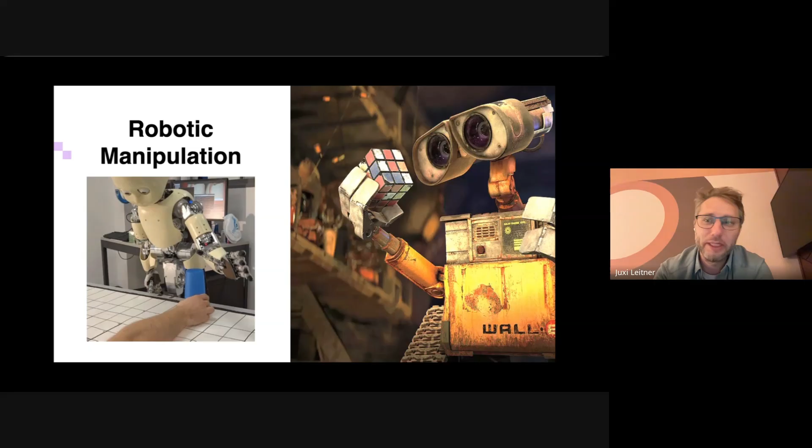You can see my hand in there, I'm trying to move this blue cup up and down and out of the way of the robot, and the robot should try to pick this up. We were very excited about this about ten years ago and what we could do with the humanoid. Obviously there's hype about these things now, but for me, trying to get robotic systems to pick up things has been going on for a long time.

And what I'm trying to do today, in the next half hour or so, is trying to see how robustness differs if you look at it from these different angles and different scenarios. I assume that most of you will be from academia. And so let's start with the academic point of view first.

So I've been working on robotic manipulation, as I said, for a while, as also mentioned in the intro, for a long time. I feel old when he said that, but yeah, this is work that we did in the mid 2010s. So that's 2016 to 18. We worked on how we can get a robotic system to be robust to changes in the environment. So picking up items that are moving around, picking up items that we might have not seen before, picking up items that are in a pile or in clutter.

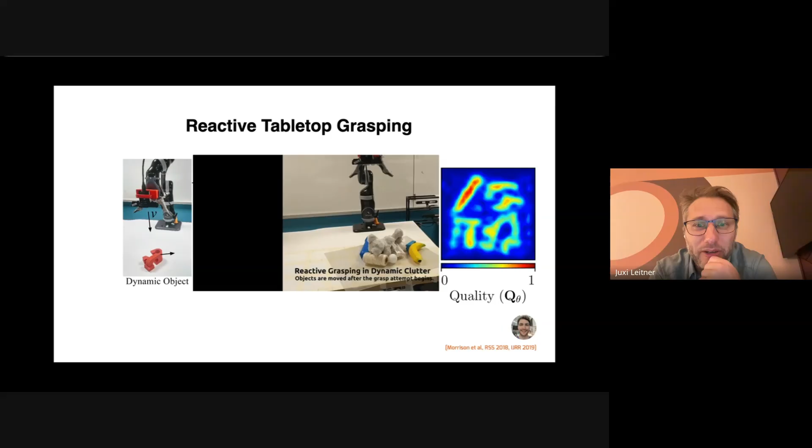But it's really hard to compare that to somebody else's algorithm. And so one of the things that we tried to do is, can we somewhat standardize that? And we were not the first ones to do that.

There's lots of different ways of benchmarking grasping out there. But what Doug, one of my PhD students at the time, did was ask: can we find a more optimal way of a distribution of items? And he called them EGAD, which is evolved, like evolutionary computation. It's still a thing. An evolved data set of different items that provide a grasp difficulty, so from simple to complex, and a shape complexity from more spherical, round to really spiky, pointy things.

So I think that's a very common way in academia to think of how do we compare? We create a metric and we create a benchmark and we try to compare things. As I said, a benchmark is usually not just items, but actually a task that you perform. So we came up with a different way of how we could define tasks that are not just tabletop. Again, expanding on the robustness idea, we claimed that our system can pick up everything, but from the top. Can we now pick up everything from a front-on shelf?

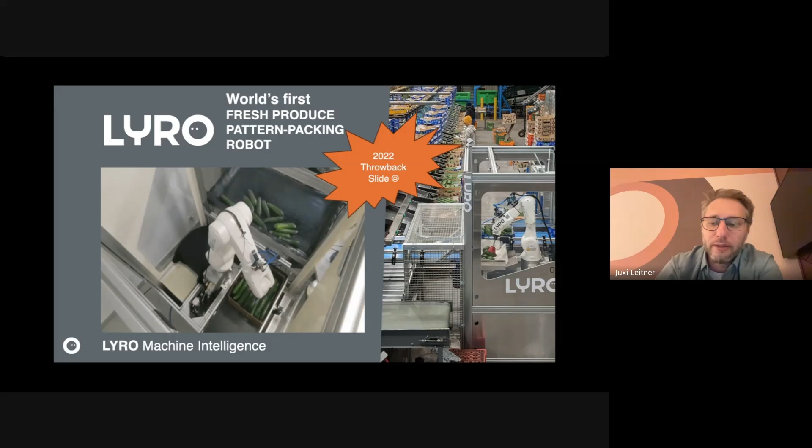And particularly, we tried to understand how we can build a product out of it. But very quickly, talking to customers, it turns out that they don't really care about the metric of your wonderful convolutional neural network. For them, the product is not the robotic system and it's not AI. For them, the product is a thing that provides, in this case, a service to pack produce items into a box. So I think this is a lesson learned from doing this tech transfer and looking at it from that different angle.

The robustness is not about the specific robustness or capability of an algorithm, but it's the robustness of the whole system. How many people do you need to stand next to a robot to fix it when it breaks? How often does it break? And what is the robustness, particularly if, let's say, you want to pack zucchinis in the morning and avocados in the afternoon, and maybe the next day you want to pack sweet potatoes. And these are all things that we tried to do with our robotic system.

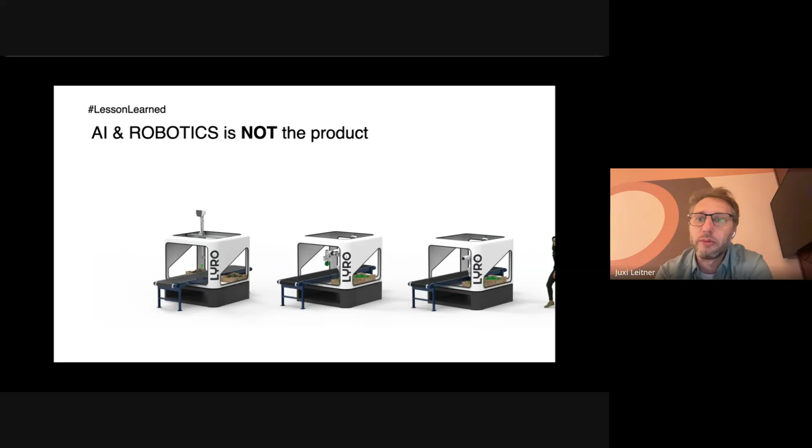The other thing, and this is again a slide from a couple of years ago from our startup, where on the left-hand side you see a very early prototype of our system, also in a warehouse-like scenario. And the BHAG is a venture capital acronym. It stands for Big, Hairy, Audacious Goal. So it's basically the main goal that you try to achieve with raising funds.

And for us, reliability and robustness, not on this slide, but under the larger umbrella, was one of the things that we wanted to aim for. And that came out of a conversation with the customers where you need to pick millions of items per week. Ideally, you want to pick a range of items, from something that's a couple of grams to something that's really heavy. I think the heaviest thing we picked was a watermelon of about 3.5 kilos. But you also need to make this system robust and reliable enough that even if you change the box type, you can actually pack into it.

And why is that actually important? Because it turns out that these boxes are not always exactly the same. They come from different suppliers and there are margins and variations in there, but they also deform, particularly if you're in a humid climate in the very north of Australia versus in the south where you might have a very dry climate.

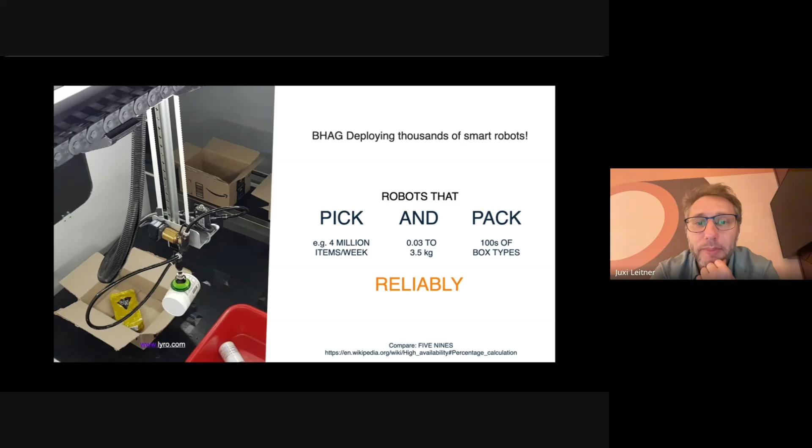These boxes actually shift around and deform a bit. And so you need to be able to be robust to those changes. So that was the pitch there. But turns out most of the investors didn't really understand what intelligent robots are. So this is a slide.

Again, I'm rephrasing what it is that we as academics would say is a robust system or a robust algorithm to something that is a robust product. And then in simple terms to investors, explain what that means. Also to customers, right? As I said, most of the time customers are not interested in the underlying technology, but they're interested in the capability.

And so one thing that for us was a core part to making it intelligent and why it was needed in the scenario is packing zucchinis here. We have a sensing system, in this case, a camera that looks down. And why is it important? Because as you can see, new produce is rolling in at random times. Even if you pick up one piece of zucchini, the other ones will slide in.

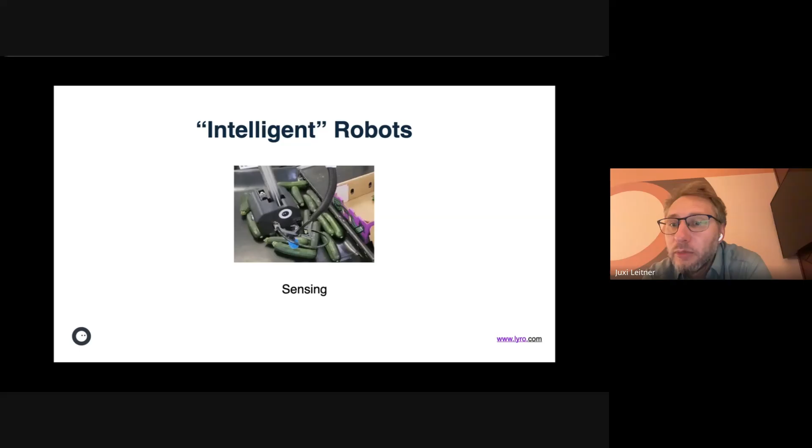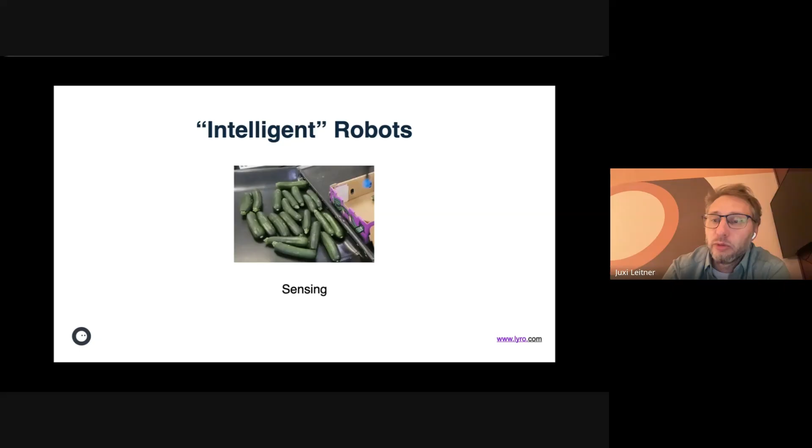So we need continuous information from the sensing capability to be robust to those changes, right? None of these zucchinis are identical. They wobble around, they roll around. And so you need to have a sensing capability that is robust. At the same time, we need to be flexible enough and adapt if things go not according to plan.

So this was the other part that we sold to customers. We are actually able to adapt. Again, we do require the sensing, but then we require the smarts to understand what the state of, in this case, the box in the world is. So we can be robust to some of these changes when they happen.

And the third part, we need to also be able to recover. And this is actually something that, I personally feel, particularly in robotic manipulation, is a less researched topic in academia: how do we do error detection and error recovery, or even just failure detection? I think it is a very important part, and it's a really critical part for startups and also for industry. And I have another slide on that later.

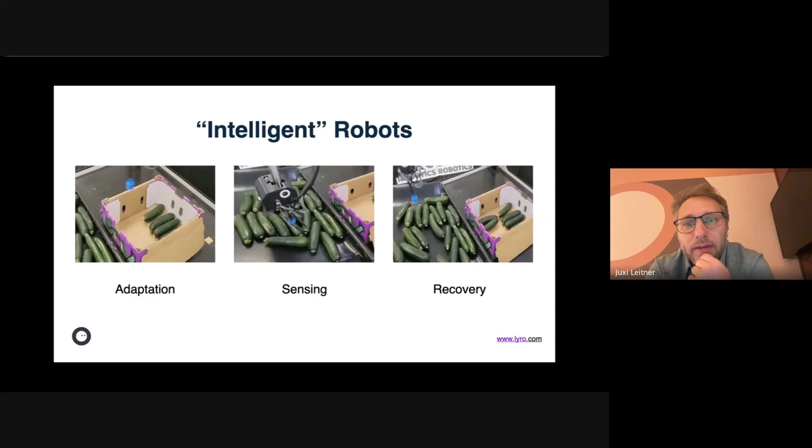And this is not just a capability question, but it's also throughput and in the end, an ROI question for a customer. So it is actually critically important to understand whether you are successful or not. In some cases, actually much more important than making it even better at the job. As long as you're somewhat okay, but you also know when you are failing, I think that's a really good entry point for a product into the market.

And so that's more from the startup angle where you're selling both to the customer, but also you're selling to investors, because you're always just half a step ahead, right? You haven't fully developed the technology, but you have a path towards it, while at the same time you're trying to convince investors to put more money in to help you with generating that technology that will create the product that you need.

And the third and more recent one, I'll talk a bit about how the challenges in industry are looking, particularly at the scale of Amazon. These are slides from Amazon from different presentations, merged together.

As mentioned before, I'm with Amazon Robotics, particularly the Berlin office in Germany, where we have a team of somewhere between 80 and 100 people. It keeps changing daily because we're hiring. It's a team specifically on a project called Vulcan. You can Google that and find a lot of information about it.

In Germany we have a product called Vulcan Pick, but we have a sister team in Seattle called Vulcan Stow. Both of us are trying to pick from these shelves you can see in the back, which we call fabric pods. They're cloth-based pods, very deformable, with very many items in them, and they have some very interesting challenges.

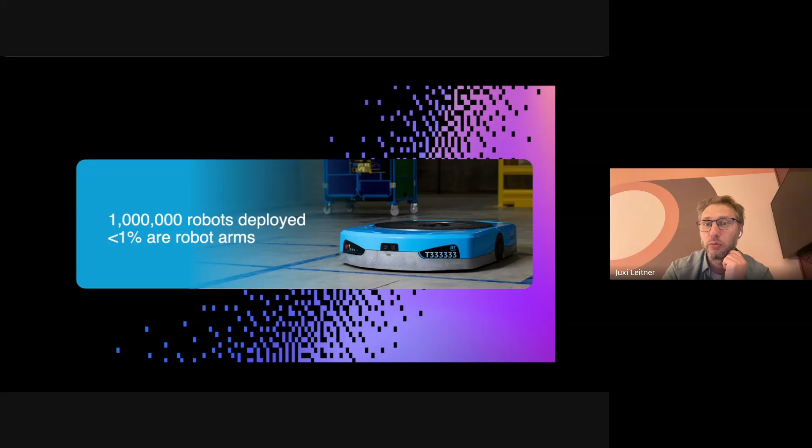Most of them are in what's called fulfillment centers, Amazon's term for warehouse, and most are these blue or orange robots that move things around, like shelves. But very few of them are robot arms, and I think there's a few reasons for that. In particular, what we're doing in Amazon Berlin is deploying more robotic arm systems to perform tasks.

There's a couple of videos I grabbed off Instagram and other places. You can see those yellow pods look like they're driving themselves, but they're being driven by robotic systems underneath, with people putting items in. You see a lady on the left putting a rather large item into the bin and struggling to get it in there.

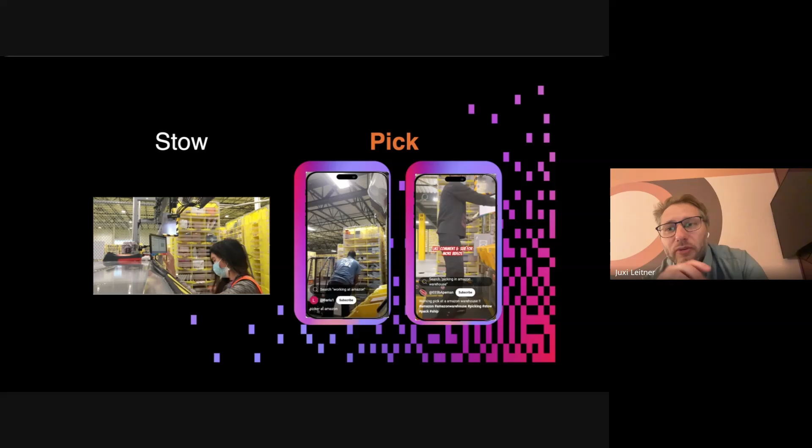You can also see these elastic bands around the bins. They're there because when these shelves move around, you don't want items falling out—there's no people in there where the robots move, and you don't want other robots to drive into them. So the person needs to push the elastic bands aside to put the items in.

As I said, this is the stowing side, done in Seattle, trying to automate that. We're trying to automate pick in Berlin, and you can see two people picking on the right-hand side. These shelves are a bit more than 2 meters tall, so sometimes people have to bend over to reach the bottom rows, and sometimes there are stairs, like in the middle video, that they use to climb up and reach the top shelves.

You can also see that sometimes people struggle to pick the right item. There were two items that looked very much the same, and you had to go in and actually pick up the correct one. These are the challenges Amazon is facing.

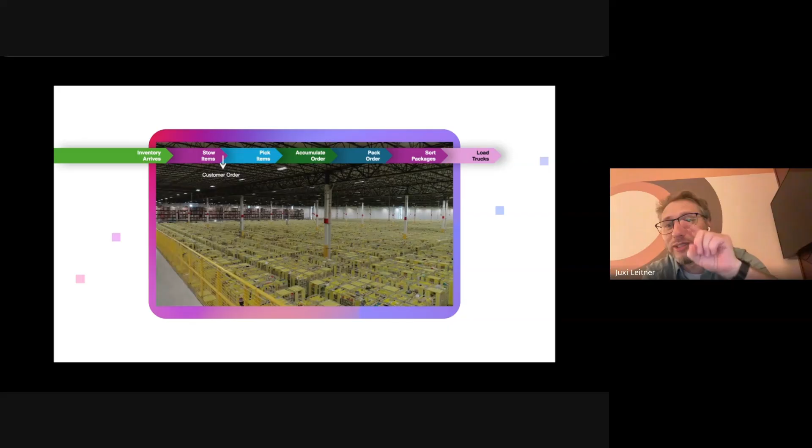But if you look at what happens once you click the button to order something—like a Wall-E DVD and a pair of socks—we're only a tiny fraction and one step in many that actually fulfills an order to you. Between inventory arriving and being stowed in these massive floors—this is a video where a drone flew through one of the fulfillment centers—you can see there's a near endless amount of shelves, and there are millions of these yellow shelves in the world.

So these items are being stowed once they arrive. Inventory arrives and we put them on the shelves, then people can order them online, and once they do, people need to pick that out. But that's not where it ends. There are many steps in sequence, and most of these steps happen in parallel. You can perform millions of these things in parallel because there are millions of orders coming through that need to be fulfilled. So the scale is pretty large, but we're only a tiny part of this problem we're trying to solve. Nevertheless, it's a quite interesting problem of scale.

There are hundreds of warehouses, thousands of robots we are aiming to deploy, and thousands of humans in each of these warehouses performing some of these tasks. There's actually some robotic systems that other teams, not ours, have deployed that pack parcels - you can Google that. There are other projects that have sorted a billion parcels in Amazon fulfillment operations.

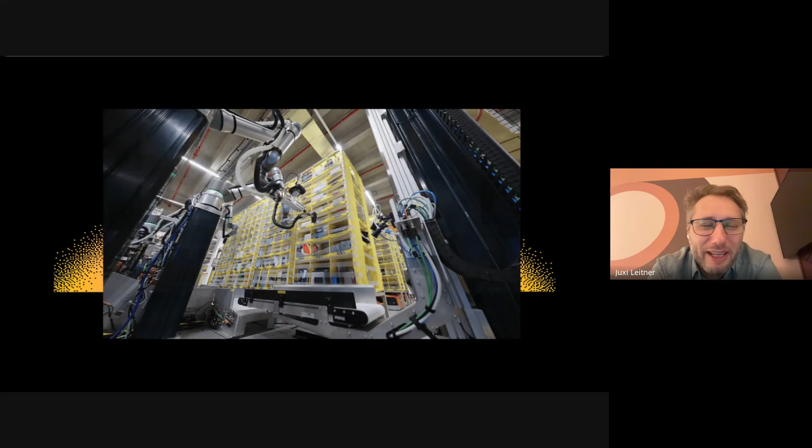But this is a picture of our actual system. You can see the same yellow shelves being driven, in this case by one of these orange drive units, to our station. You can see we have multiple robot arms required to perform the task. The team that I coordinate, called the extraction team within Vulcan Pick, deals with extracting, as the name suggests, the item out of the bin.

What that means is we have one robot arm that opens these elastic bands I mentioned before, and a second robot arm that actually drags the item out. During that operation, the conveyor belt is moving up, and we drag it out of the shelf onto the conveyor belt. Then that yellow shelf can move away and the next one can arrive. After us, somebody deals with the item once it's on the conveyor belt. That's the way of parallelizing the process so we can process a large number of systems.

I've hinted at this before - this is what we actually see. One of the nice things, and I'm an applied science manager meant to bring science into the product, is that the whole world for us, as Amazon manipulation or Amazon pick in this particular case, is a couple of inches by a couple of inches of a bin, all a couple of inches deep. So it's a very small world. We don't need to solve the whole self-driving car problem where everything needs to work everywhere on the planet, or domestic robots where every household is completely different. We have a very small world, but in that world, there's lots of things happening.

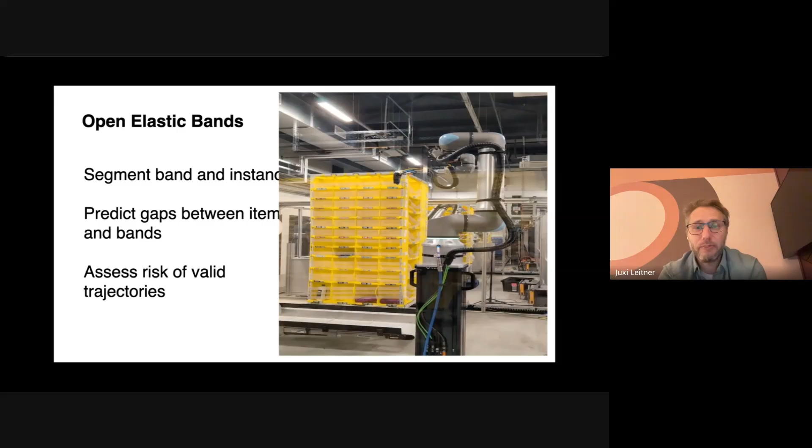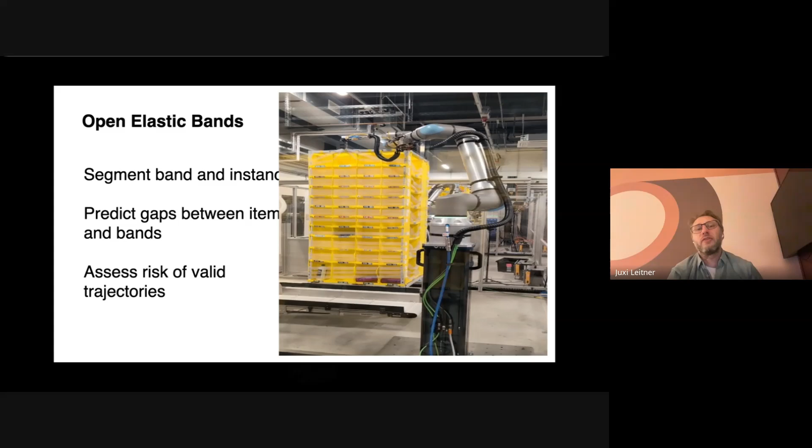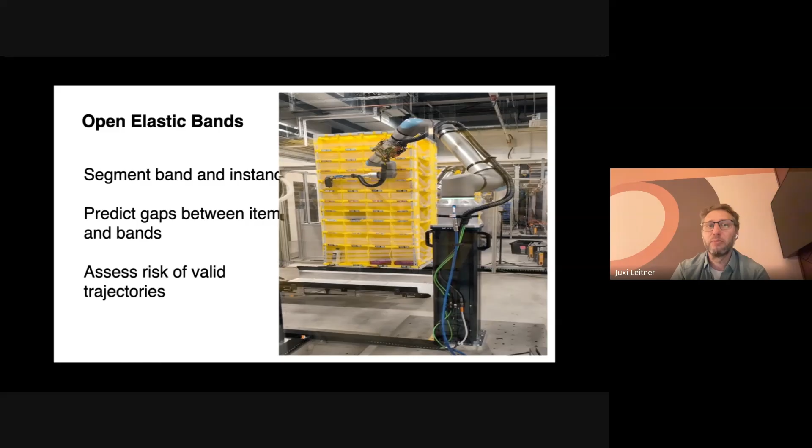This is a prototype from a couple of years ago. We tested different end effectors and different vision systems just to see whether that's feasible. To get these projects going, even at Amazon, and probably even more so at Amazon, you need to showcase that you have all the capabilities in place so you can actually perform that. It's not a complete moonshot. Yes, sure, at the beginning it is, but then you work through it and say, well, can we pick from clutter? Can we deal with those bands? Can we deal with that wobbly shelf? You want to showcase all these capabilities before you start building the system.

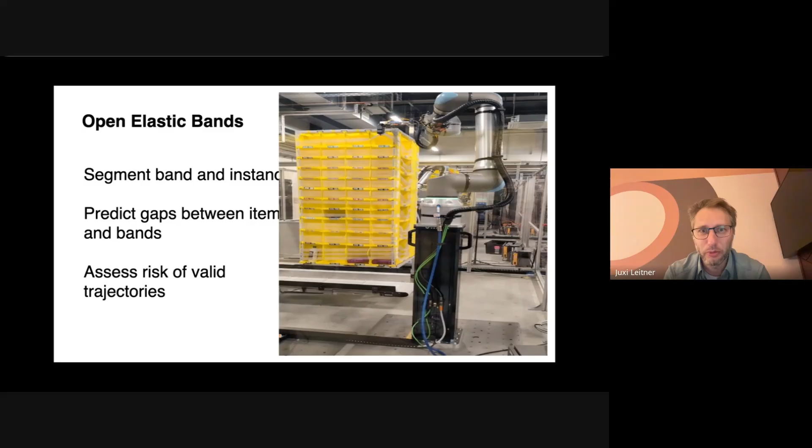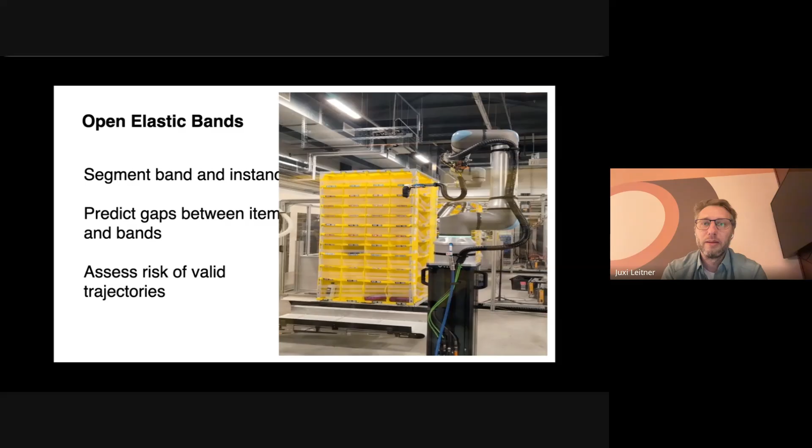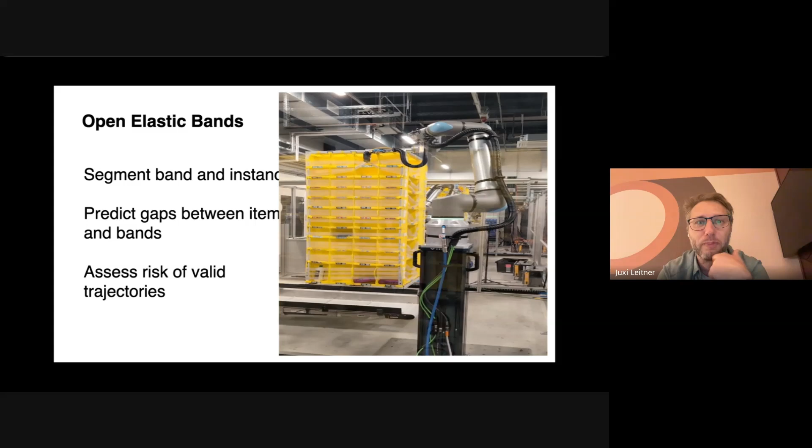So this is just the robotic system trying to open these bands. Personally, I find it really fascinating because elastic bands are super tricky. The perception is super hard because these things don't reflect very well, so your depth reading is very much off. So you kind of visually need to estimate where things are. But we actually made it to a point where this is becoming very, very reliable. And it needs to be robust to changes, because there are millions of these shelves out there. All of them have been interacted with for a different amount of time, and some of these bands are very stretched out, some are very fresh. So the forces and how you interact with these bands actually vary quite a bit between different interactions. And this is the robustness that we now care about — how can we actually deal with that part?

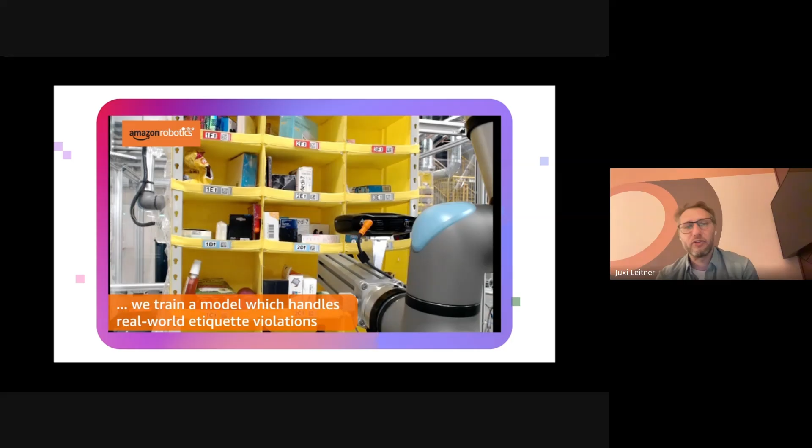The other part that we need to be robust to is: we'd like to get an item out, but sometimes an item is blocked by another item. This is actually not trivial — sometimes there are two things stuck very close to each other. So we started using policy learning and reinforcement learning to learn policies that will allow us to drag an item out, even if there are occlusions, even if one might be covered by something, or there's a lot of interaction potentially going on. The really interesting thing is, to make that robust, we actually don't care about what the item is — we care a lot more about the interaction between the items. So we actually work in depth rather than RGB, because it's a geometric problem much more than an item ID problem. And that allows us to work in a simplified simulator, which we can transfer to the real world, and you've seen that here in the video where we're trying to make that happen. This is aiming at being robust to the millions and millions of items that we actually interact with and get to see.

But then actually to extract the item, we need to do a bunch of different things as well. We need to first of all understand how many items are in the bin, and this is sort of where we start — we segment the items out. And then we need to understand which one of these segments is actually the item that I want to pick.

If you pick up a blue toothbrush rather than a red toothbrush, people will be slightly unhappy, but it's probably not a big issue. But if you pick up a Samsung instead of an iPhone, people will care that you sent them the wrong item, right? So part of the problem is how do we deal with that?

There's a lot of different item ID questions, so identification questions that need to happen before we even get to the point of pick pose generation, right? We first need to understand which part is the right item, potentially then do some 3D matching or shape completion before we can figure out what are good pick poses.

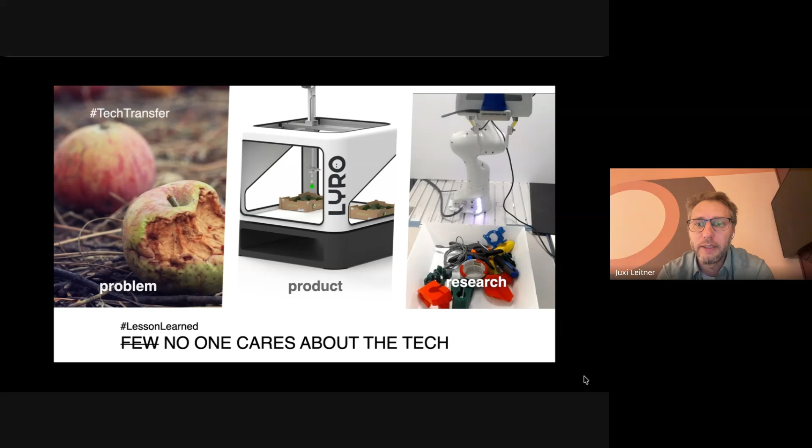And in particular the metrics that I encountered over the last decade or so, they do differ, and there are reasons why they differ, but I think it's important to understand that robustness means different things to different people. And it means different things depending on where you are in this journey from an algorithm all the way to a product. And yes, in this case, it's going through various different companies and startups. But even if you do that within one organization, you need to be aware that these things shift.

Right? So you might start with something simple, like how often can I pick up that item? Your stock standard grasp success rate. Or, how accurate can I be in picking up an item? And maybe how much is my throughput? But at LYRO and in industry, other things become more important. Like cost is a metric that we care about, obviously. Defects at Amazon.

MPPH, as I said before, is mean picks per hour. MPPH per SQM, per square meter, is a metric of how much of the floor space you are using with your robotic system. And that becomes more important, particularly when you retrofit. And other things, not particularly to Amazon, but lots of deployed robotic systems will care about MTTR, mean time to recovery. So if something does go wrong, how long does it take to go back up again? So it's usually a metric around downtime and uptime.

Hey, great talk, Juxi. Thanks. So does anyone have any questions? Okay, so wait, let's start with Rahul. Let me just read Rahul's question. I don't know if Rahul's online.

So he's asked, how does recovery mechanism take place? For example, picking of fresh produce. Is there a rank of choice? If certain item pickup fails, does it go to the next best choice? Yes, that is a good question. That's actually a great question. There's usually not just one way to solve that, right? And like with algorithms and everything, there might be a trade-off.

How we did it in that video that I showed. Actually, let me go back to that one. At LYRO, what we were trying to do is, let's see. So, in this case in particular, we have a metric that will tell us what is a good grasp point. Doesn't matter what that is. In this case, it's a deep learned one, but it doesn't matter. So it basically gives you a map of where good grasp points are in the world.

And so basically what we did here is an inhibition of that activation if we just tried it, right? So there's a temporal aspect to it. If 20 milliseconds afterwards a new image comes in and we do the same optimization again, we get a different set of grasp points. If we performed an action, the neighborhood of where we just tried to pick up would get an inhibition, as in their activation function or their fitness score or whatever you want to call it, is reduced. And so therefore, we would try to pick up something else, right?

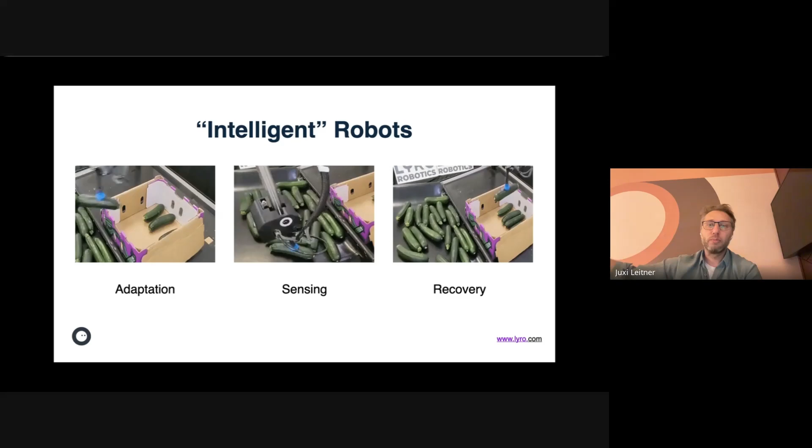And so that's the way that we dealt with it in this case, where we knew that we are in a semi-static environment, and the semi part is critical here. We can't guarantee it, but we assume that it's static for the time between taking the image and trying to perform the action. But if we take another image 20, 40 milliseconds later, we will most certainly not get the same output. And so we actually leverage that aspect by saying, well, if you can't do it, we'll just take another image, and we force a variability with that inhibition of the previous grasp point. And so the next one will pick a different best choice.

So we don't actually have a ranking from before. We always do that on the fly, but the temporal aspect will inhibit certain geometric areas within the image frame. I hope that sort of answered that, Rahul. Okay.

Okay, so the next question is from Karthik Nambiar. Karthik, go ahead. Hi, thank you. Am I audible? Yeah. Yeah, thank you for the wonderful talk.

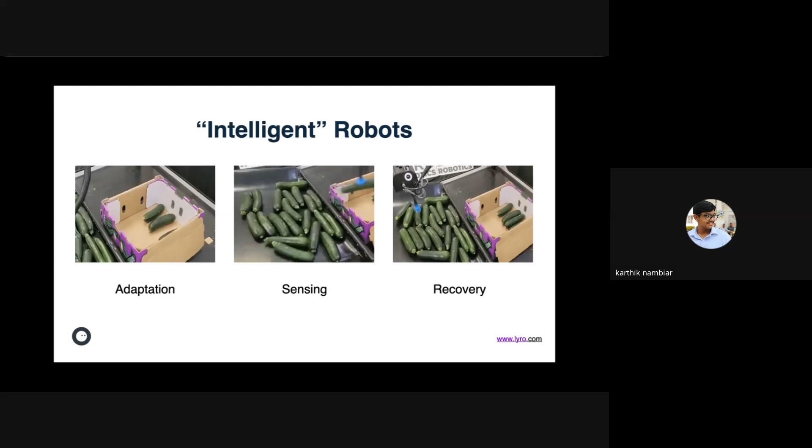I had three questions basically. One was, how do you solve the sim-to-real challenge? Do you use simulations in your tech? Second one is, what are your thoughts on VLAs, vision language action models, in real life applications? And third was, manipulation is basically mimicking what humans do, so is there any better system to interact with objects, or better automation systems other than manipulation, that can tackle these sorts of problems? Thank you.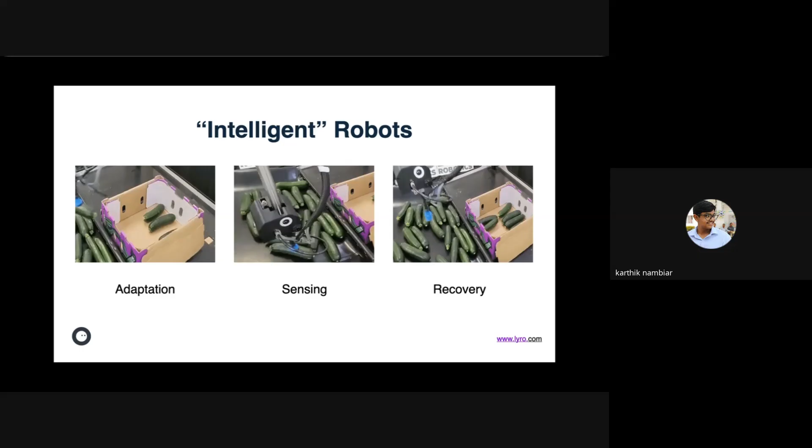No, those are all great questions. I'll start backwards, and if I forget what the previous question was, I'm already sorry for it. But manipulation, particularly in the case that we do here in the Lyro videos, but also at Amazon, we don't have humanoid hands, right? I think they are probably not at a level where it makes sense to deploy some of these systems. Although if you go to robotics conferences, you'll find new hands all the time.

So I feel manipulation, for me, yes, mano, from Latin, means hand, and that's the same that we use for human hands. But I don't think manipulation in robotics requires a human-like hand. I think there's lots of different ways of dealing with it.

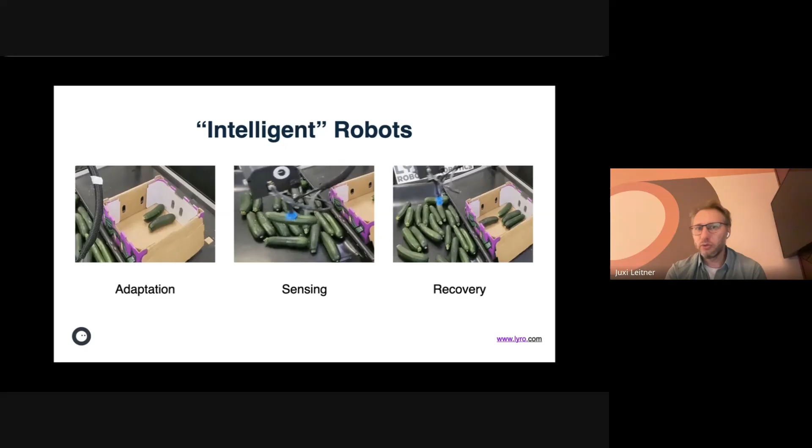In terms of automation, yes, you can do a lot of things with automation. You can do flippers and gating and fancy mechanical sorting systems to get from A to B. You can Google it and find lots of different videos of how we as the human race, for thousands of years, solved some of these things with pure mechanical solutions, and they're very fascinating.

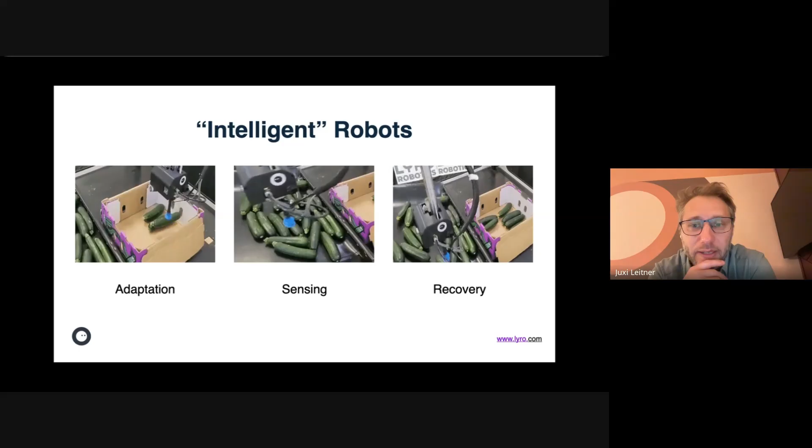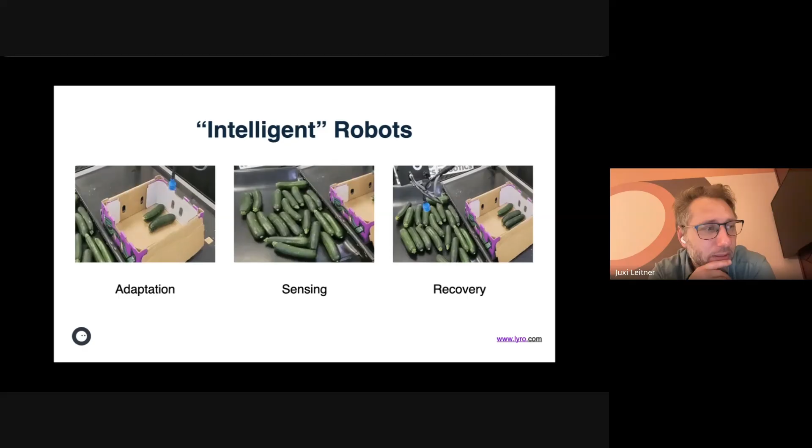But I think there's a limit to what you can do, and I think you require some sort of manipulation, but I don't think you require fingers. A vacuum suction cup is a very robust industrial solution to that. I'm skipping the VLA question for now. What was your first question? Sorry. How do you solve sim to real challenges?

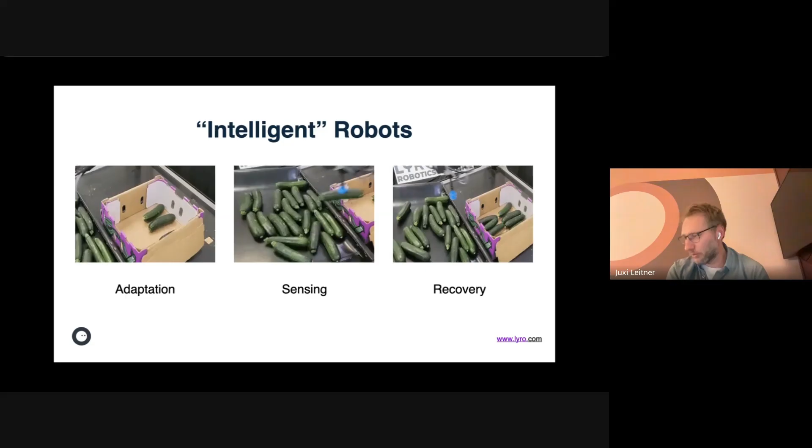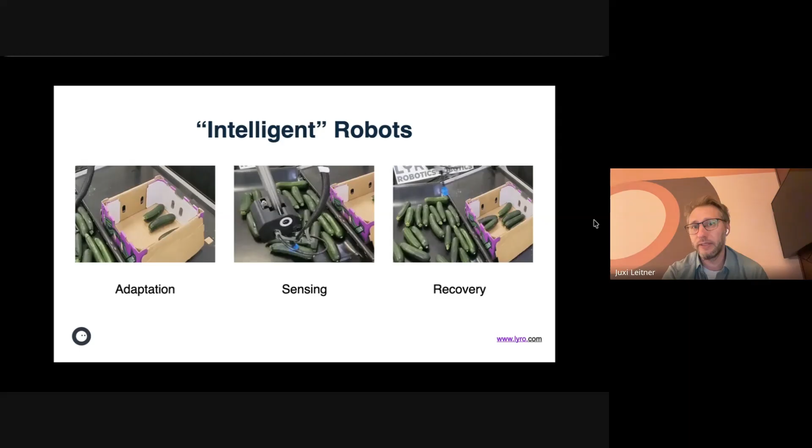Sim to real. Yes. That's an excellent question. So in different parts of my career, there's different ways that we solve the sim to real gap. I think generally you should be smart about what you simulate, right? So having the right choice of what your simulator simulates and doesn't simulate, and then dealing with the outfall of that, I think is critical. So in this scenario here, let's see if I can stop the video at the right thing.

So one of the things that we did here is we focused on something where the sim to real gap is not as bad as purely on a computer vision side, and we focused on depth. Because the depth image we can simulate relatively nicely, we can even put some noise on it. But actually, the transfer of the depth images is significantly easier than an RGB image. So this is one way that we closed the sim to real gap, so the transfer was a lot easier.

I don't think we'll always get to the point where there's no sim to real gap. I think you just have to live with it. But I think smart choices about the simulator and what your problem space is will make it a lot easier to solve the sim to real gap.

And now tying that in with VLA, I think VLAs are an excellent, exciting technology. I think they're early stage, and I think it's important that we still perform a lot of academic research on them. I know there's a bunch of startups that are trying to solve interesting problems with them. I don't think we have yet figured out what the best way of leveraging VLAs is, right?

So about 15 years ago, convolutional neural networks came on, and everybody was like, cool, how can we use that for robotics? And everybody was like, I don't know, throw a bunch of data at it and see what happens. And over a couple of years, we figured out that the real core of a CNN is a really nice feature extractor. It gives us really cool, robust data-driven features that we can work with. I think we haven't found out what the VLA equivalent is, what the VLA gives us, but I think it will be a tool going forward that we will have used.

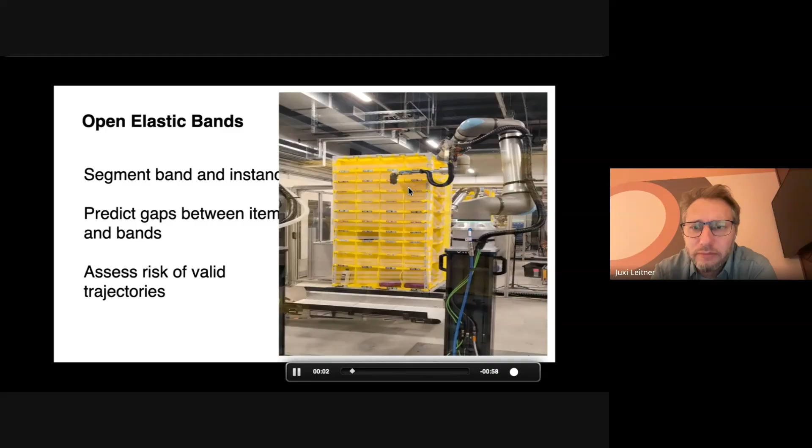Thanks for those questions. Both are actually excellent questions. So yes, we do use other sensors. We have force torque sensors on the UR robots. We also have proximity sensors. On that hook, we actually have a proximity sensor, so when we make that motion we don't run into the top of the fabric pod, right? There's some variability, and you can see here where it actually partly runs in there. So we have a proximity sensor on there, and we have proprioception, the joint positions of the robotic system as well.

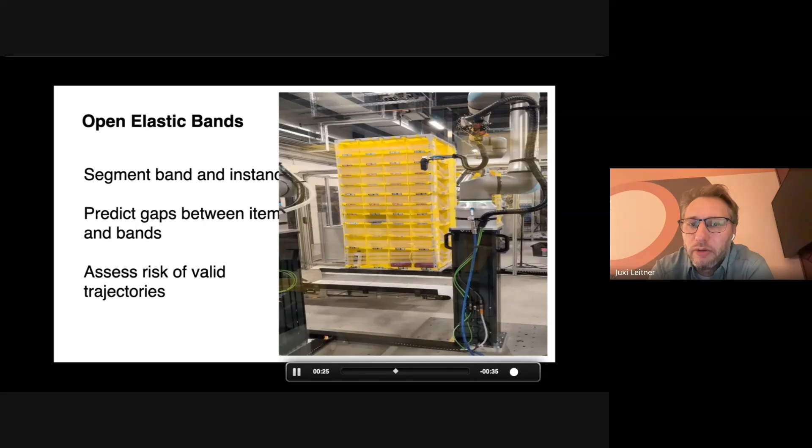And ideally, you want to cover as much as possible with your sensing, particularly at the early stages. Maybe that's slightly off topic, but usually at a very early stage of some of these products, you probably put way too many sensors on it, just because you think you might use it. And then you realize that some sensors are not needed, or you want to replace them with something better, right? Vision is a very powerful sense because it provides a lot of information, and you might later be able to remove other sensors because you can do that from vision.

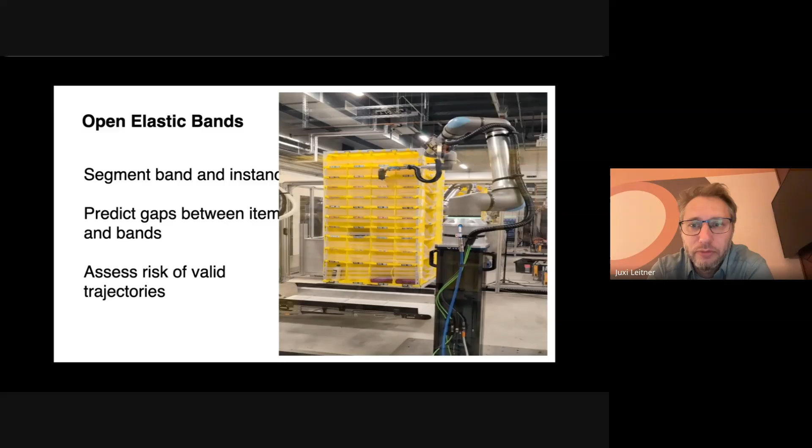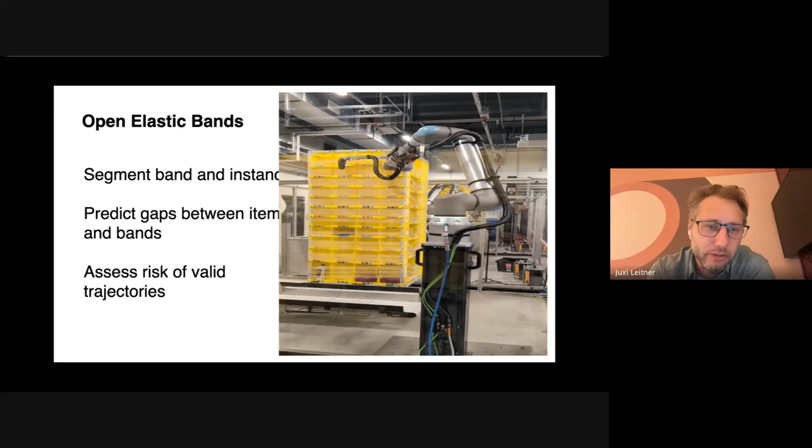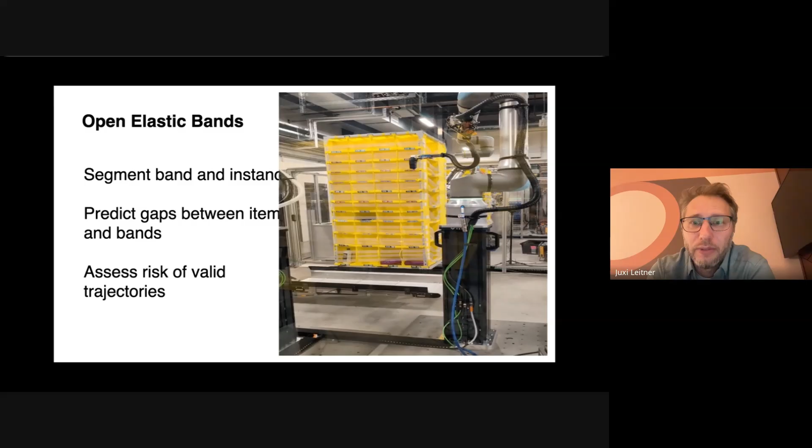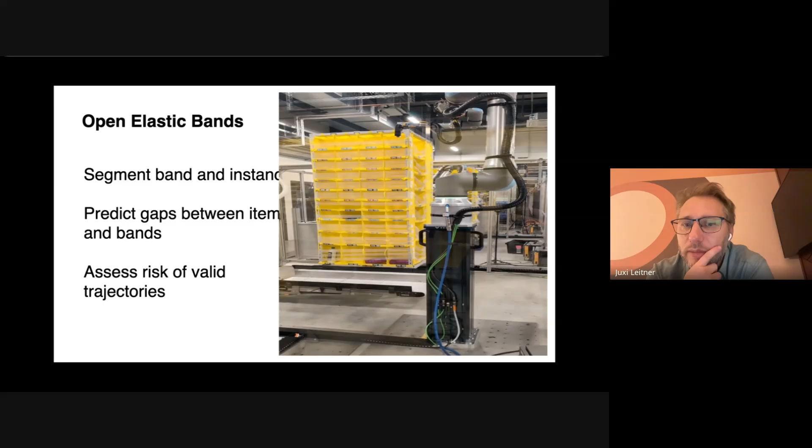About the first question, I know that a lot of people are doing behavior cloning, teleop, data collection, particularly for humanoid robots. For us, there's no point of actually learning any of these things, because what we still haven't figured out, and that's maybe also a comment about the VLA before, is how do we extrapolate, right? Interpolation between human teleoperations is something we've shown works for some really interesting complex tasks: laundry folding, cable insertion, a bunch of really cool bimanual tasks.

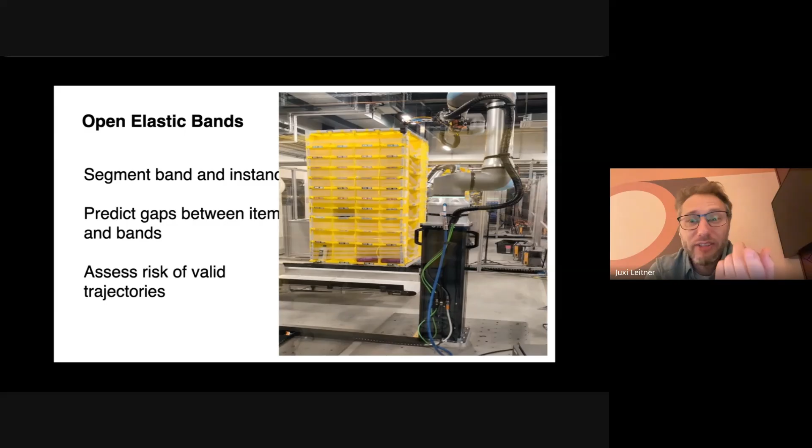But actually, the motion here is both not complicated and very specific, right? If you look at some of the extraction videos here, the extraction motion highly depends on the scene that you see. So even if you do 1 million teleoperations, you might not capture enough of that space. Behavior cloning gives you a funnel of trajectories that you can stay within, and if you go outside of those bounds, you can come back. In these scenarios, we don't have a funnel. They're so different to start with, and all that's the same is we know roughly where the endpoint is, but everything else is quite different.

So for us, heuristics are a very good starting point, and then reinforcement learning in simulation, particularly if you can do the transfer, is what we chose because it allows us to extrapolate to previously unseen scenarios really well.

And we do have a combinatorial problem here, as in if there's 20 to 30 items in the bin in lots of different configurations, you have millions of items, potentially hundreds of millions of items. That state explosion of what can actually happen is somewhat tricky.

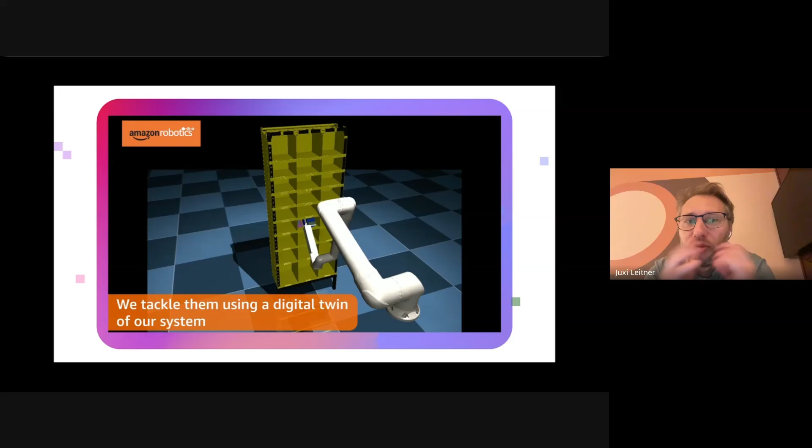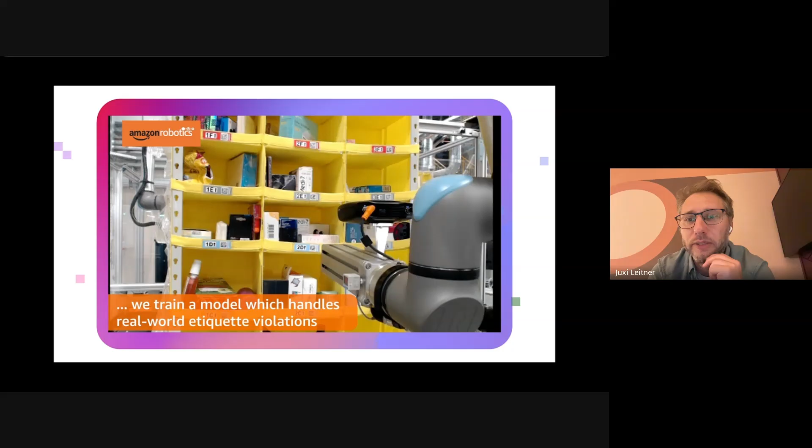So I feel that is maybe a bit of a gap in the whole humanoid robotics space. I think it's fine to seed your trajectories with human examples, particularly if you have a higher degree of freedom robotic system. But I think we sometimes overfit to human trajectories, and I don't think that's necessarily always the right thing. I hope that answered the question. I think it was maybe slightly evading, but I hope it was still useful.

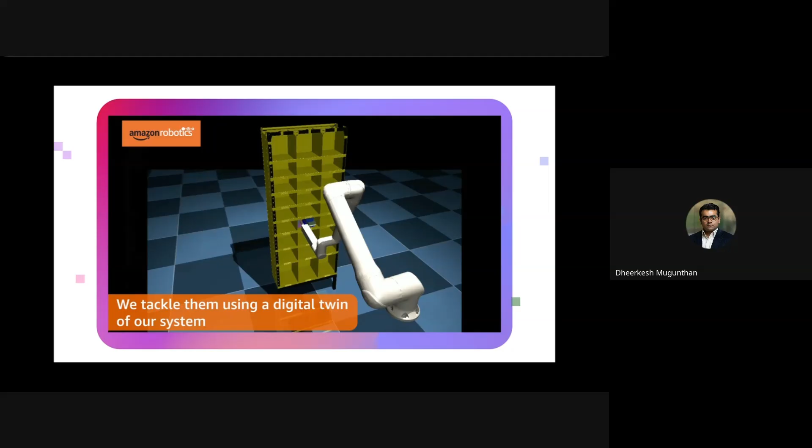My follow-up to that was also, with actual manipulation, how do you ensure that the force is not so excessive that you damage the product? Essentially, two questions, sorry about that. Yeah, no, all good. You're a bit low on volume, so let me just rephrase to make sure I understood the question correctly. So it's basically about forces in the bin and how do you make sure that you don't have damages, both when we extract the item and pick it up, and also how do you compute how much force to use when the center of mass is not really visible and there's so much occlusion that it's hidden behind multiple other packages, right?

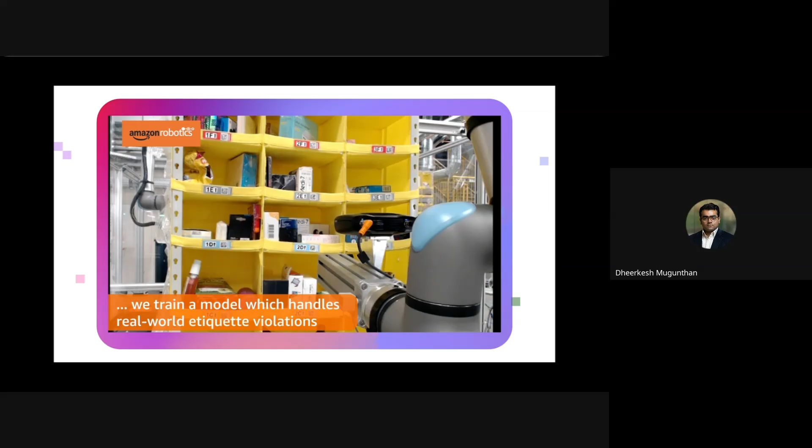Yes, absolutely. So it turns out you don't actually have to be super complicated about these things. And that's the same thing at LYRO as we do with Amazon. Vacuum suction is actually a really well understood industrial problem. And really the only thing that we had seen at LYRO was giving bruises to the produce if we suck too hard, or partly ripping things off when we are in the Amazon scenario. So basically you can do this by just slowly increasing the pressure that you apply and having some means, usually you just put a flow meter or something like this in your pipes, so once you have a seal...

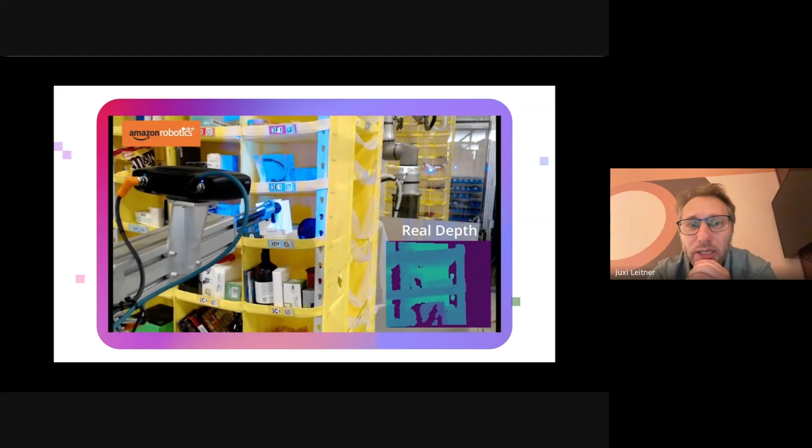And particularly for the Amazon scenario, anytime you have a seal, that's good enough because we don't need to hold it for a long time and swing it around and involve a lot of dynamics. We actually just drag it out, right? So we don't even have to fight gravity for too long because as soon as gravity acts on the item, we can let go and let it fall onto a conveyor belt.

So I think that's one of the smart choices that they made with the system. You don't actually have to deal too much with not knowing where the center of mass is or not knowing exactly the weight. We do have some information about it beforehand from Amazon's databases, the kind you can see on the webpage when you order things. But it turns out vacuum suction cups and flow meters is a very good combination to have very high robustness with just a simple controller around it. And I think that's really one of the core reasons why people still use vacuum suction cups over a hand, fingers, tweezers, or other things, because it's so much easier to integrate and implement reliably and robustly. Actually, I think one of the questions in the chat was similarly about gently pushing surrounding objects out of the way.

I think gently pushing things out of the way is slightly different, but knowing when we actually run into items, we can use force torque sensors and other things, but also vacuum flow detection to understand whether our seal is breaking. It's a very good reasoning method for us to understand whether we were successful: can we create a good seal, and is the seal constantly maintained on the item until we extract it.

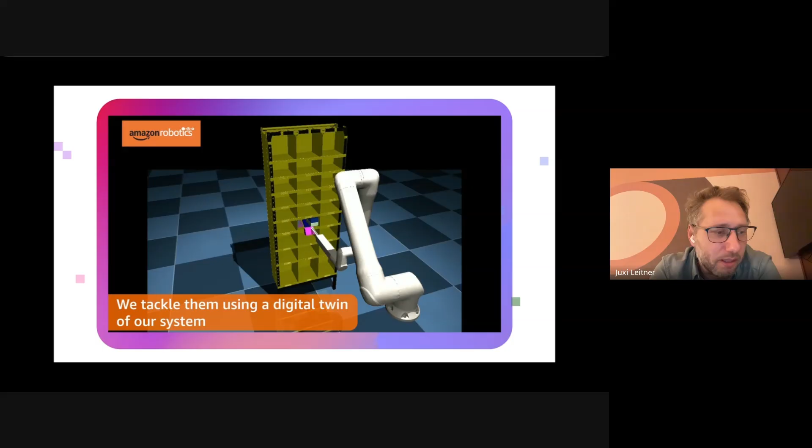Now there's obviously a caveat. You can't do this if an item is like a sieve or a colander, where there's just a bunch of holes and you can't really create suction. But luckily there's not too many items like that. It's clearly a limitation of our system, but it's one that I think is a very well understood and decent pragmatic trade-off that we chose.

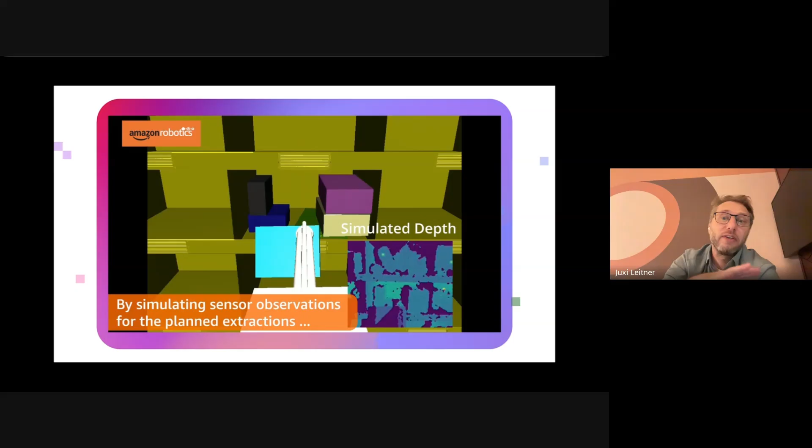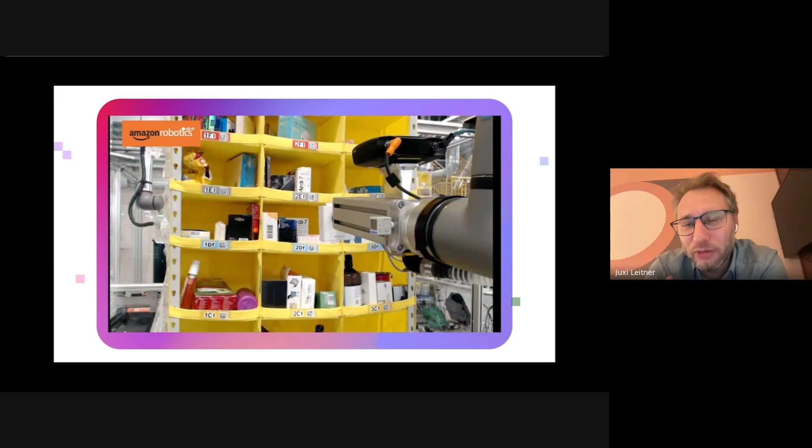There's actually one more thing I'll add. When our system team that stows the item handles it, they have a significantly harder problem because sometimes they actually need to make space - they need to squish everything in so they can stick the book in. That is a significantly harder problem, and unfortunately I can't talk too much about this one, mainly because I don't know exactly what's done under the hood. But they've written some papers about it, and if you Google Vulcan stow you'll find some information. For them, the dynamics of that information is even more important than it is for us.

Got it. Thank you so much.

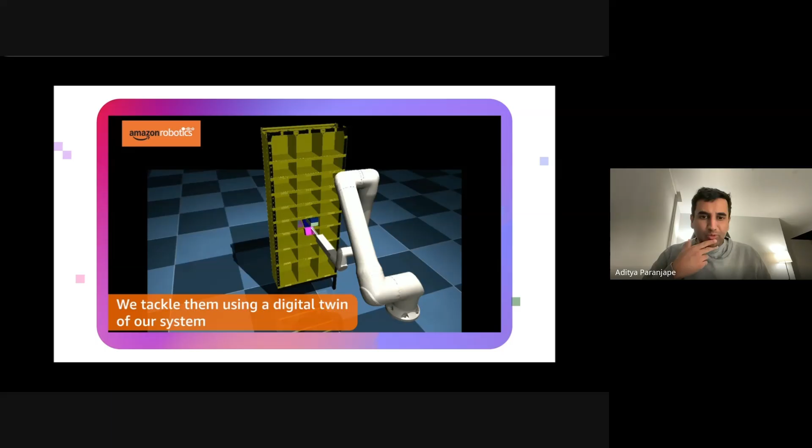Okay, great, thanks. So Juxi, we have one question in the text. This is about transferring learned policies from simulation to real life, which comes with its challenges. How do you tackle those, and what perturbations do you account for while training?

That's a quick one to answer. Like I mentioned some of the sim-to-real before, choosing the right things to simulate makes the simulation closer to your reality and therefore easier to translate. It does help if you have large compute resources because we can put a lot of noise on it and run these simulations many times. So how do we tackle that at Amazon? By running a lot of these simulations in parallel.

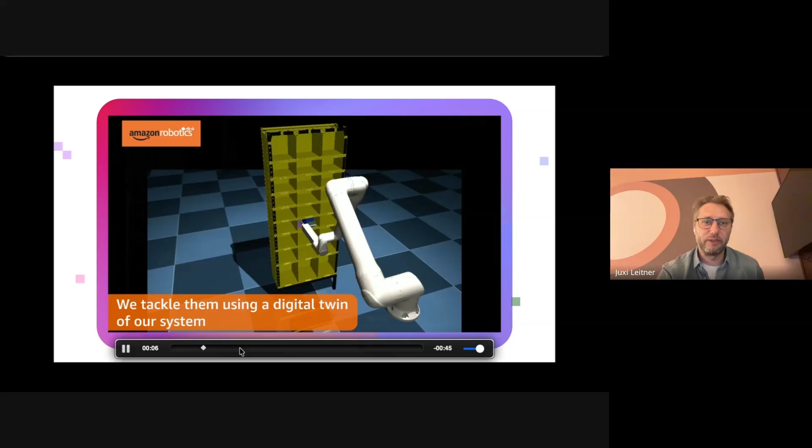I think the video is still playing in the background, but you can see here where all of a sudden one of these MuJoCo simulations runs, and a bit later you'll see that we can actually run a lot of them in parallel. That's one of the advantages you have at Amazon - you have a large amount of Amazon cloud compute, and that allows us to run a lot of these things with perturbations. Usually the noise level comes from position error as well as depth error in this particular case.

So again, understanding what your simulation is and where your gap is coming from - kind of like when we did sim-to-real transfer a long time ago with vision policies for computer games, the whole Atari thing and other things DeepMind did. They understood that a lot of the noise comes from colors being perceived similarly by humans, but the numbers you get out of a sensor vary quite a bit. So you do some fancy in-painting or change of color to address that. Again, understanding what the core differences are and how you choose them.

And again, I think for us that makes a lot of sense. Then you can model the noise of your depth sensor - particularly if you have millions of images from your depth sensor, you can actually model the noise relatively well. But also still playing around with running a bunch of these things in parallel so you can be robust to these changes, since both interpolation and extrapolation can be done. That's how we deal with that, and it works maybe surprisingly well, but it works relatively well.